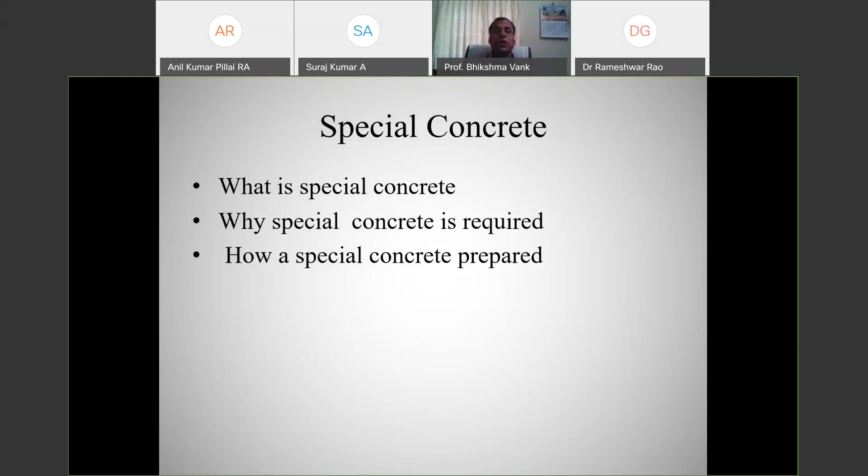And for special concrete, we definitely need special materials—fibers, bacteria material, different types of fibers, different types of cement, different types of admixtures, and different mix design methodologies. That is why we need special material in it.

Suppose we want to make self-compacting concrete, for which we need modified mortars, several admixtures—all these materials we require. So the purpose of this concrete is to make our concrete more durable.

And we want to see previous concrete. What is previous concrete? There are two meanings actually—old concrete or earlier concrete, and present concrete. Present concrete means the high strength concrete which we are making now. Present concrete, typically, we are making with robo sand.

We are making concrete with robo sand. What is robo sand? Artificially made sand. Why are we making artificial concrete? Because it is the order of the day, because river sand is not available. When sand is not available, we are supposed to make the concrete with robo sand, artificially made sand. For example, in our metro rail also we have used 100% robo sand, since river sand is not available.

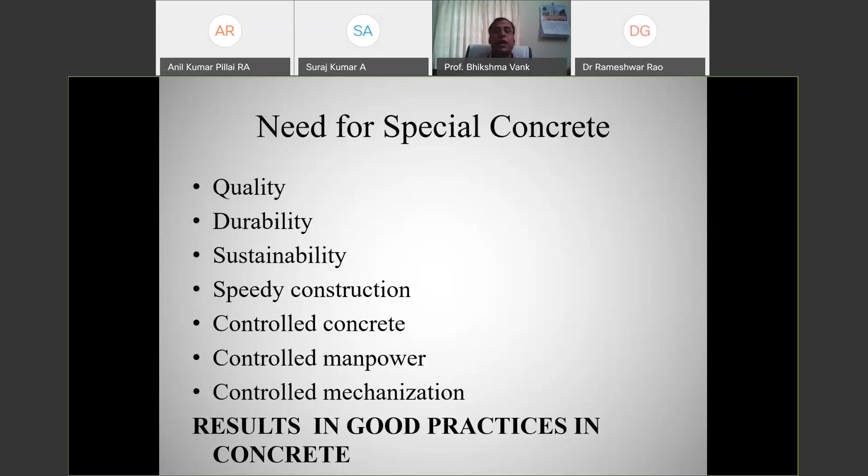Similarly, geopolymer concrete is one such concrete emerging in the present scenario for solving some of our problems. So fiber solves your crack problem, and bacteria solves your repair problems, crack repair problems. What problems are going to be solved with geopolymer concrete? You can ask me this question - each special concrete has some significance, some important solutions.

So what solution does geopolymer concrete have? Geopolymer concrete cannot be used as mass concrete, as I told you. We can use it as a special application concrete for limited applications - we cannot produce it as mass concrete in bulk quantity, so we are not able to produce that. But still this concrete has a future for special applications.

What is that special application, sir? You can ask me this question. Special application means, suppose we are using concrete for water tanks, sumps, drainage areas, your dams.

Wherever water retaining structures are there, our concrete is subjected to several leakages and dampness problems. So we can densify the concrete by using it for water structures - water tanks, water retaining structures, dam structures, and sumps - so that we can minimize all our leakage problems.

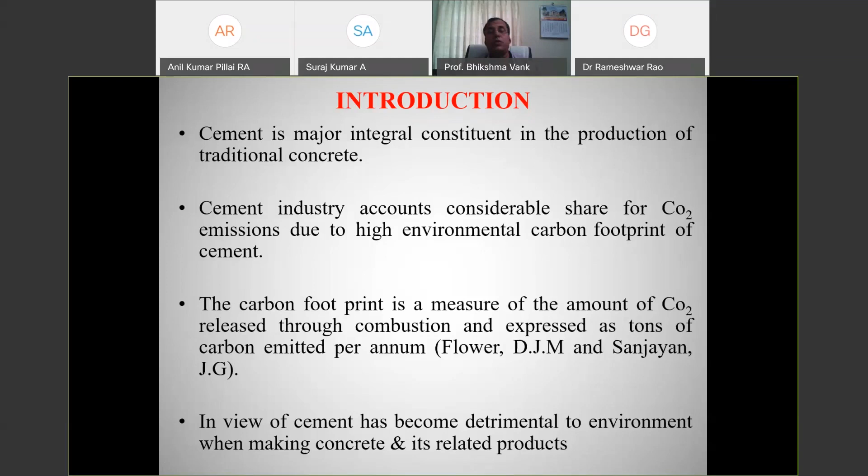Keeping that in mind, we are trying to use geopolymer concrete for making good durable concrete. So this is the general introduction. To make the geopolymer concrete, to minimize the cement content and to use the geopolymer concrete, we are using another blended material, GGBS, ground granulated blast furnace slag.

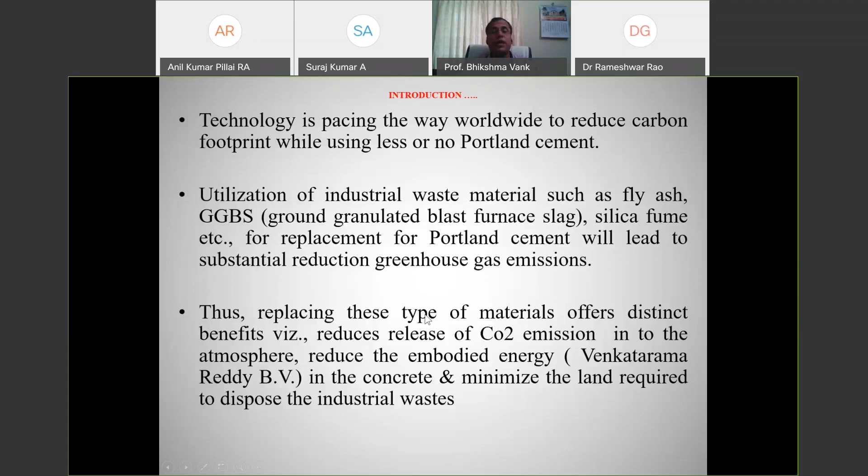This is a material which is available in several industrial places. So we can use this GGBS into our fly ash and we can make the concrete. That is the importance of the geopolymer concrete, and how a geopolymer concrete we can make. The standard procedures are there, and those procedures are being developed by the Curtin University.

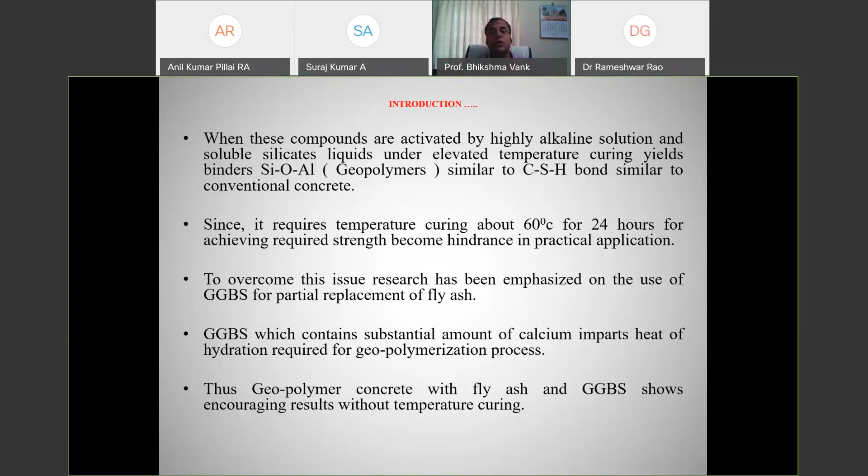We can make the temperature curing at 60 degrees. Such researches have been done earlier, but now 60 degrees temperature is practically not possible at site. So keeping that in mind, instead of temperature, if we can add GGBS into our fly ash, we can get heat of hydration and a good geopolymerization process. That is the motto with which this research has been moved.

And the research significance here is the necessity to make geopolymer concrete, as it is a partial replacement into the concrete. In the present study, it establishes the grades. We have done this research at our university. We can make concrete right from M20 to M60 by replacing GGBS into the fly ash material, and we can obtain the mechanical properties, and we can also develop the grades for M20 to M60, and we can also use this concrete into the RCC. That is what I'm going to show you.

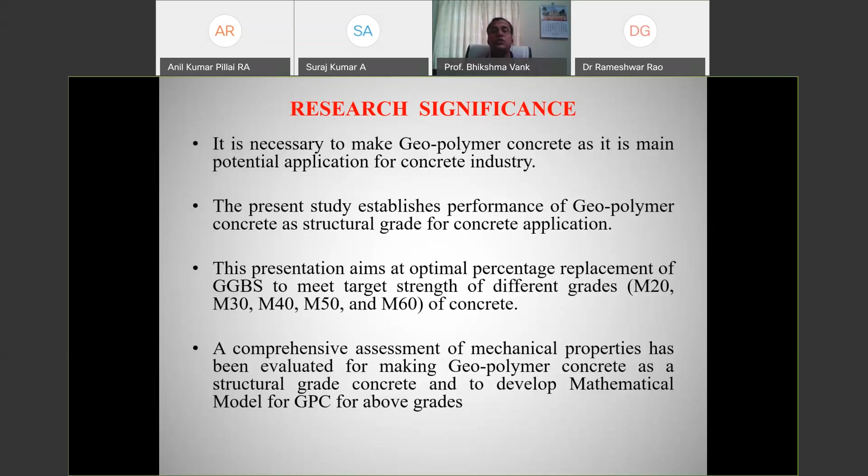The investigation was carried out at Osmania University on geopolymer concrete. These are some of the literature reviews done by several researchers. I don't want to go deep into the literature review here, but I'll try to explain the procedure of obtaining the compressive strength, the several trial mixes of geopolymer concrete with addition of GGBS, replacement levels, etc.

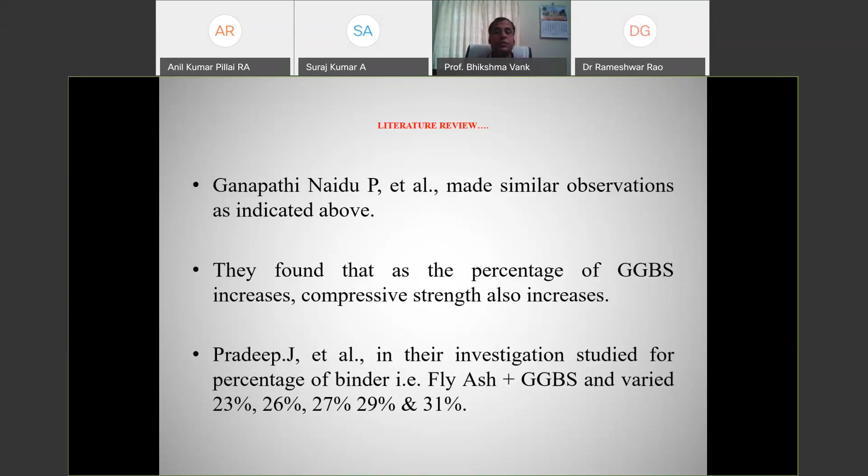I'll discuss with you the replacement ratios adapted: 25%, 50%, 75%, 100%. So I can tell you all the details. Many people have done work using GGBS, but nobody established the grades. So this is a work which is done at Osmania University, myself and my research scholar Naveen Kumar.

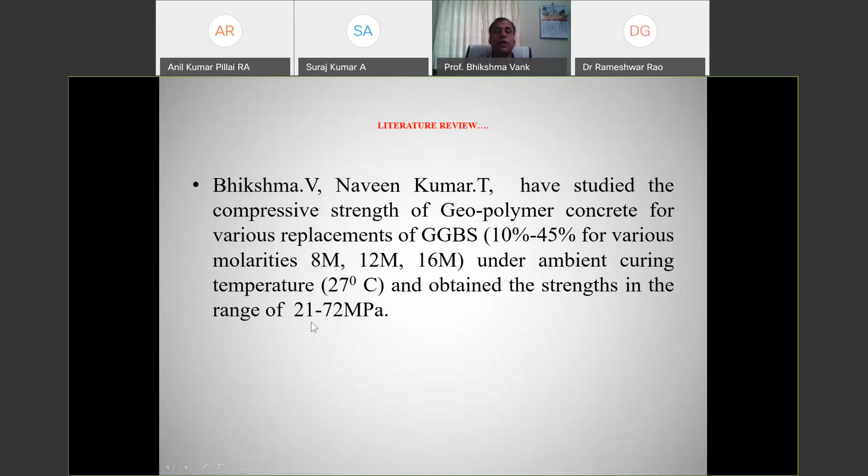We replaced GGBS 10% to 45% for the grades of concrete M20 to M60, and molarities of 8, 12, and 16 have been taken. This work is not with temperature curing; this is under ambient curing at 27 degrees, 23 to 27 degrees room temperature only. We obtained strength of 21 MPa to 72 MPa. That is equivalent to nearly M20 to M60.

So here, as I told you, I can show you this research for M20 to M60 grade concrete with the replacement of GGBS 9% to 43% after several trial mixes. We have obtained these values.

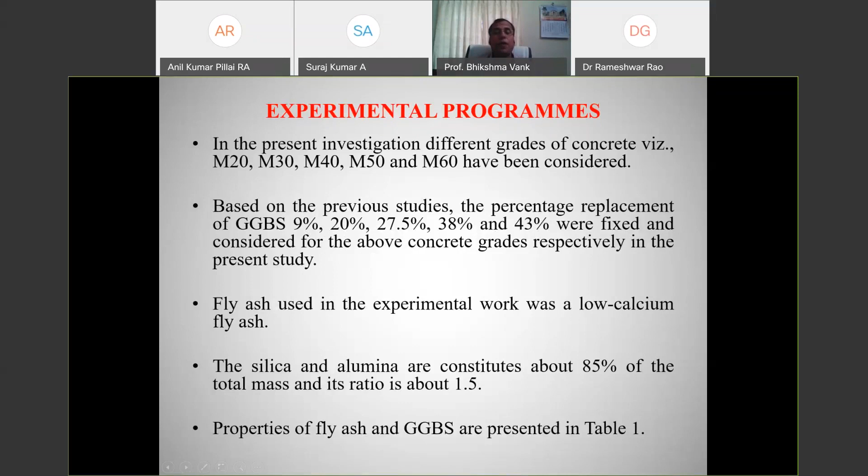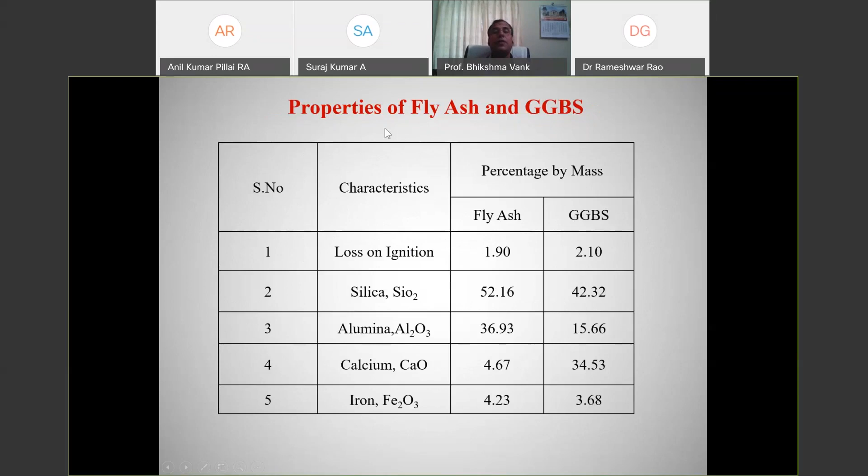So properties of the fly ash and GGBS are like this. We have investigated the fly ash material and GGBS percentages of the mass, and arrived at physical properties. These are the locally available materials: fine aggregate, then coarse aggregate we have taken, and the additional material used in this is a mixture of sodium hydroxide and sodium silicate.

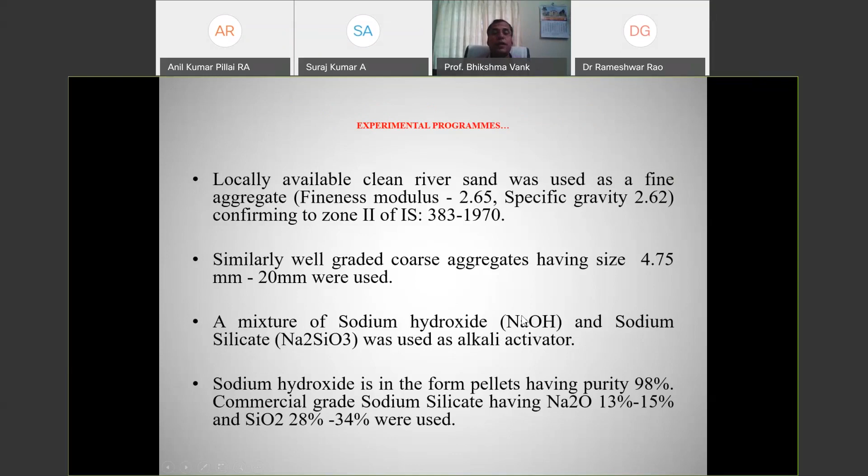You can even use potassium hydroxide and potassium silicate, but those are quite costlier compared to sodium hydroxide and sodium silicate. So that is how we selected. To make the geopolymer concrete, this is the combination: sodium hydroxide and sodium silicate give the alkaline liquid, or potassium hydroxide and potassium silicate give the alkaline liquid. The first combination is better and cost effective.

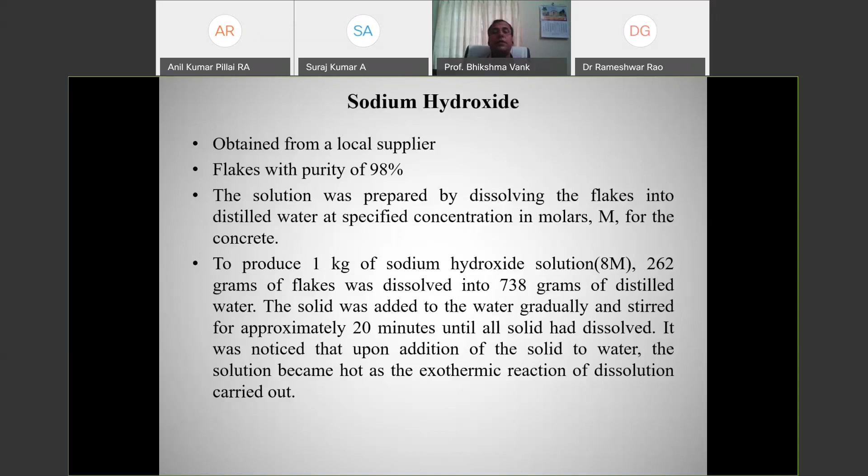All these procedures are given to produce 1 kg of sodium hydroxide solution at 8 molarity: 262 grams of flakes dissolved into 738 grams of distilled water. This is the procedure of the mix design. We have done several trials and got the compressive strength values. These are the requirements of sodium silicate: Na2O 14.7%, SiO2 29.4%, water 55.9%.

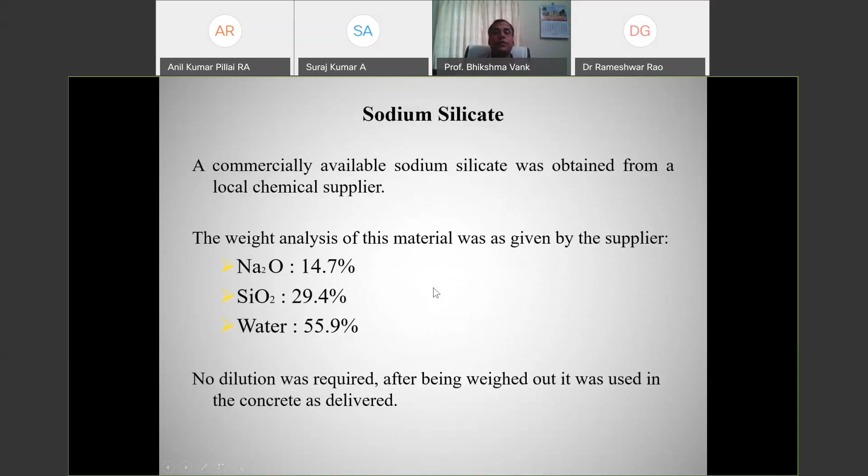This is how the mix design was taken, and this is very interesting: sodium hydroxide and water plus sodium silicate, and finally the preparation of the alkaline liquid will look like this. One day before the concrete casting, we need to add all these and keep the solutions ready, and only the next day, after 24 hours, can we make the concrete. This is sodium hydroxide material, this is water, and this is sodium silicate.

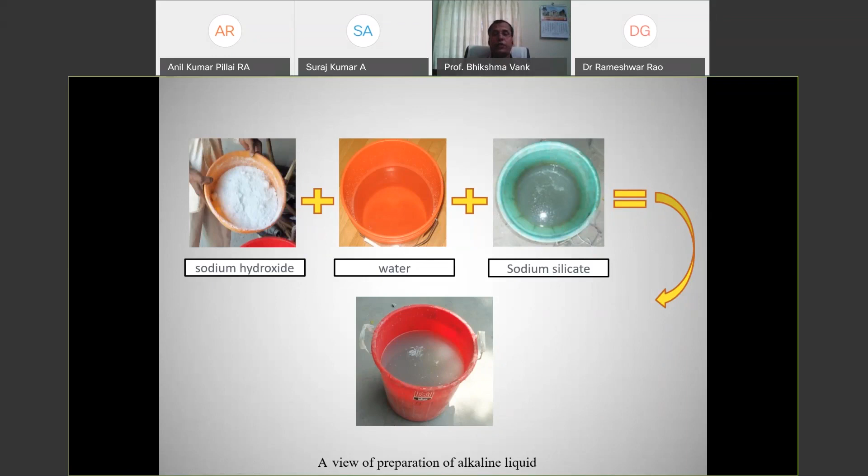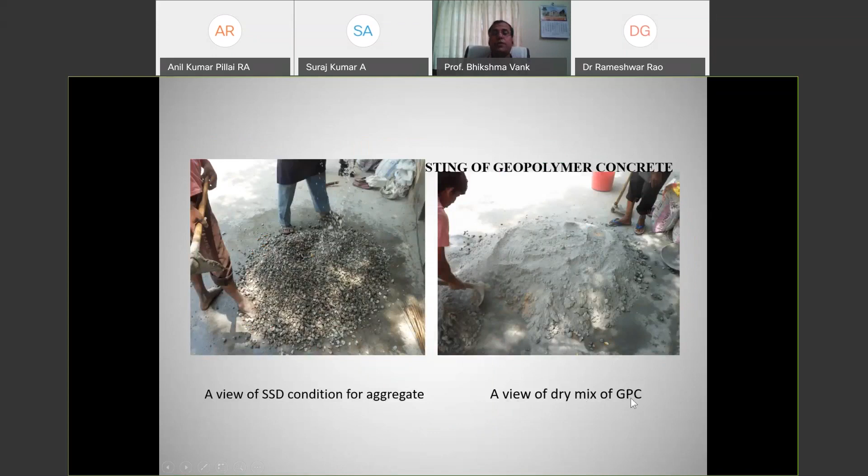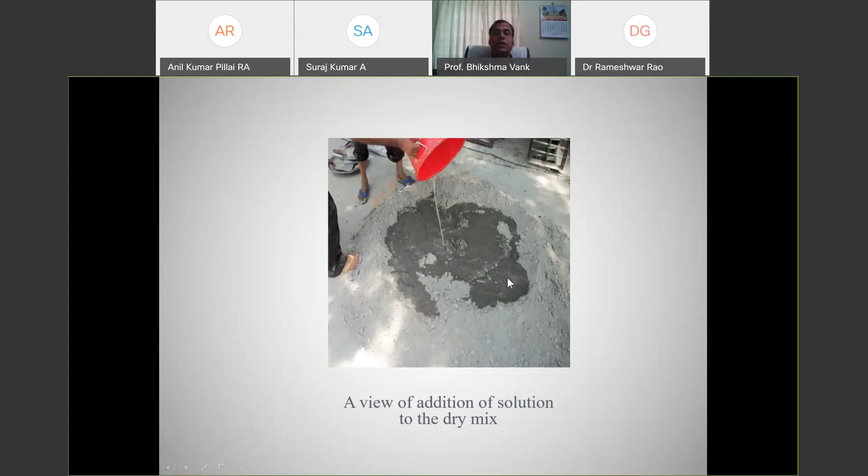We can get the alkaline liquid in this manner. This we have to add into the concrete, and I will show you how the geopolymer concrete looks. This is normal mixing of fly ash and GGBS, using the SSD condition of the aggregate, and a view of the dry mix of geopolymer concrete. We mix like this, and then add the solution. This is the addition of the solution—you add it like this and mix the concrete.

This is called geopolymer, freshly mixed geopolymer concrete. It is very homogeneous, you will not have any honeycombing, and it is very sticky—we can make good quality special geopolymer concrete. For all the grades we did several mixes to arrive at this type of concrete. It took nearly 2 years for us to understand this and make concrete of this nature.

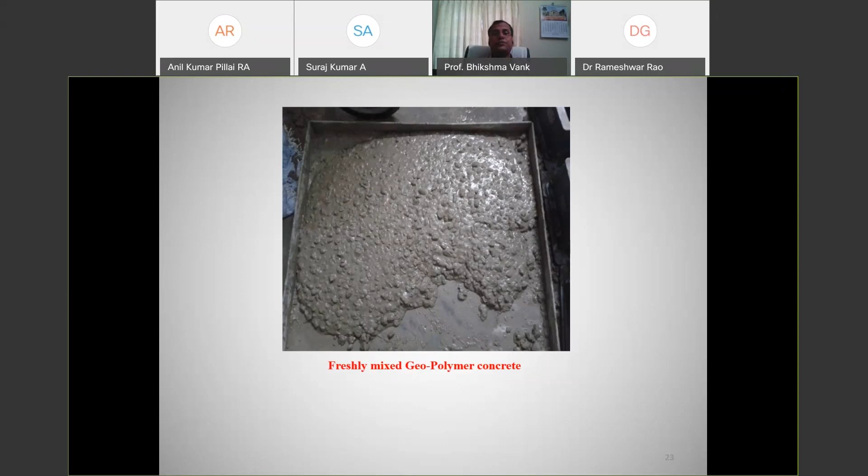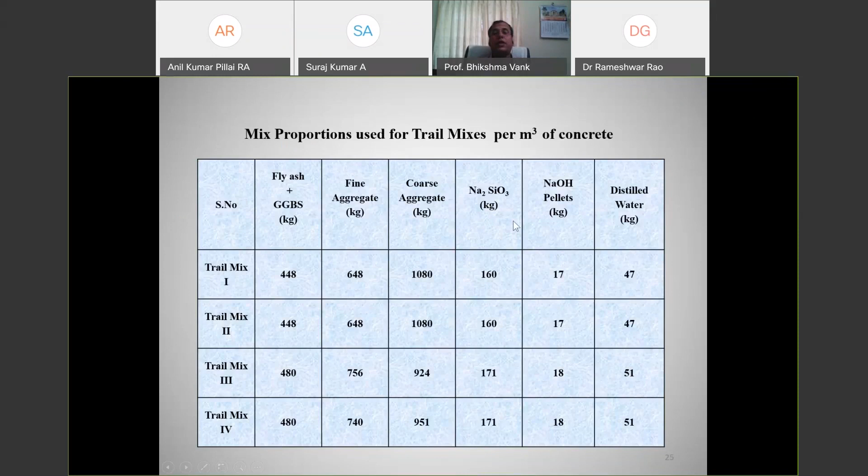Trial mix 1—several trials were done. Phase 1 trial mix programs for M20 to M60. For each trial mix, per cubic meter of concrete, trial mix 1, trial mix 2, trial mix 3, trial mix 4 we have done, with fly ash plus GGBS, fine aggregate, coarse aggregate, sodium silicate, sodium hydroxide—everything. This is how sodium hydroxide and sodium silicate look, and this is how the mixture is actually prepared.

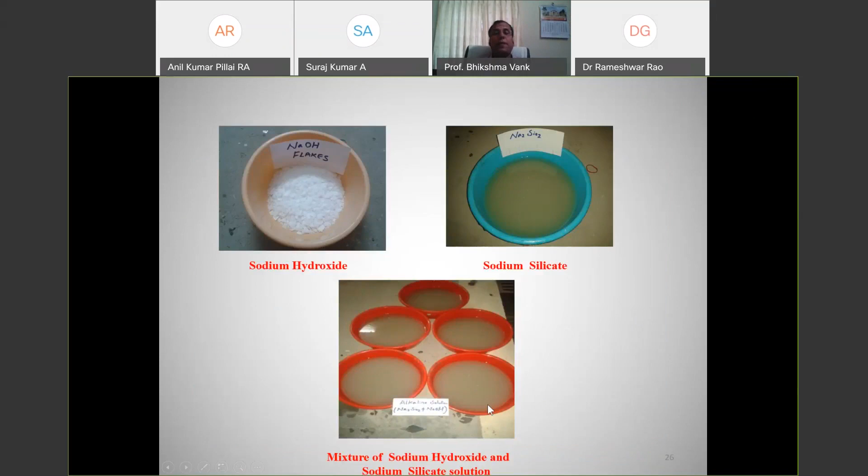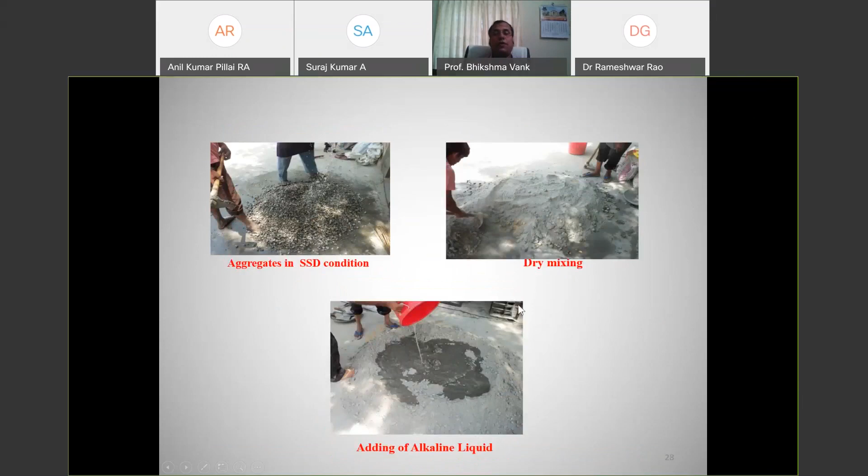Results of compressive strength for different molarities were: 17, 20, 24, 27, 30. As the molarity increases, compressive strength increases. But if molarity increases, the cost also increases. So therefore it's better to look at lower molarity—that is better for the research.

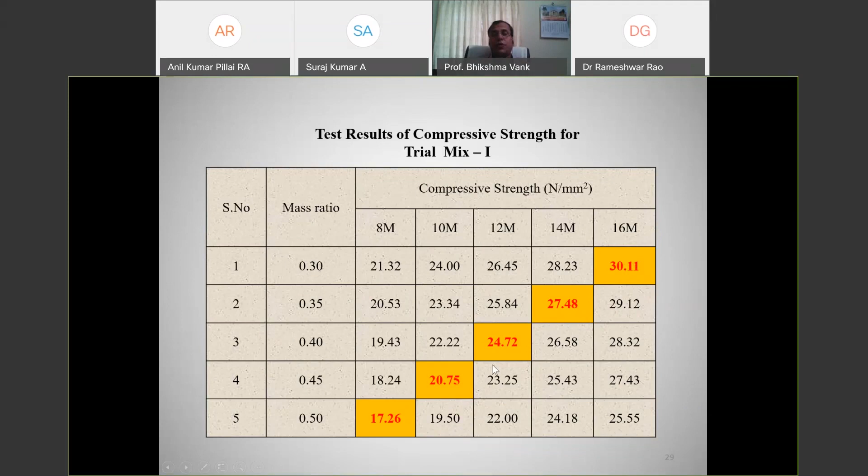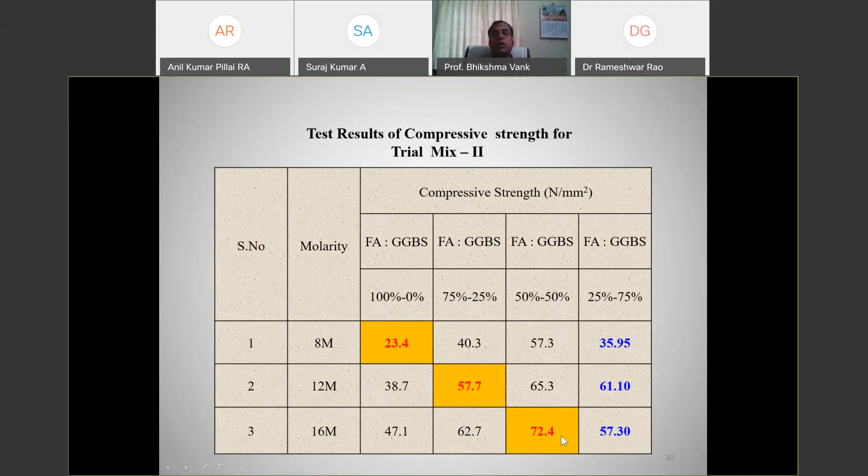If your molarity is increasing, your cost is also increasing—compressive strength is more, but cost is also more. Results of compressive strength for trial mix at 8, 12, and 16 molarity were 23, 57, 72. For trial mix 3, we got similar results: 8, 12, 16 molarity ranging from 46 to 72. The results for trial mix 4 ranged from 31 to 73. This is the final mix we got.

What we have done at our university is take only 8 molarity. For 8 molarity, we concentrated more on compressive strength, for grades M20, M30, M40, M50. For GGBS content: M20 is 9%, M30 is 20%, M40 is 27.5%, M50 is 38%, and M60 is 43%. As the grade increases, these proportions increase—and we have established these grades ourselves.

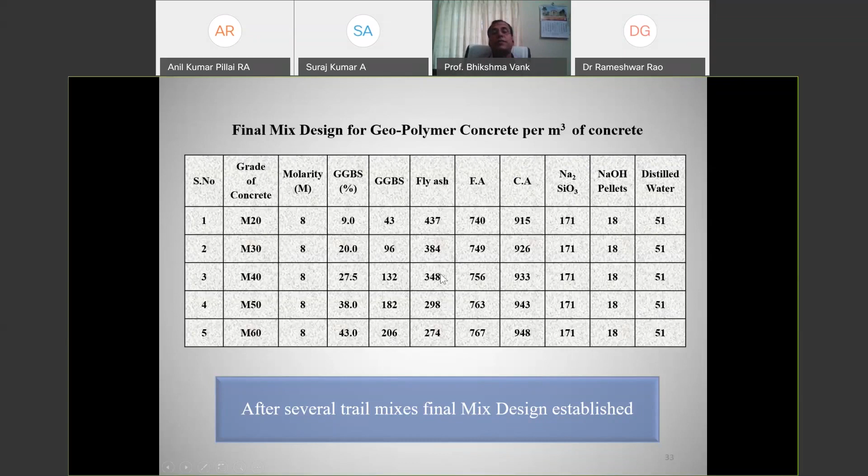Earlier, geopolymer concrete grades were not established. So with 8 molarity, we obtained the target strengths with these mixed proportions after several trial mixes. These are the trial mixes given. The mixed design for geopolymer concrete is arrived at for no cement and without heat curing—ambient curing—for M20.

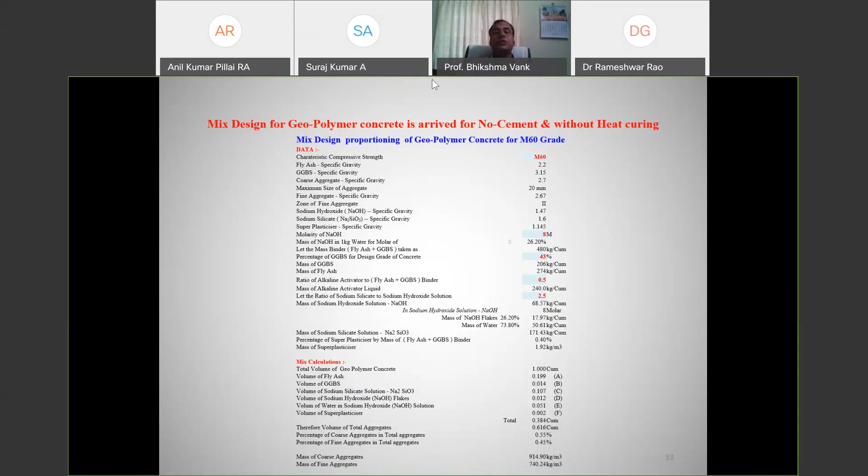This is the mix design done for M20, this is for M30, this is for M40, this is for M50, and this is for M60. All these trials have been done, and special concrete has been made. To improve the workability, dosage of superplasticizer has been used.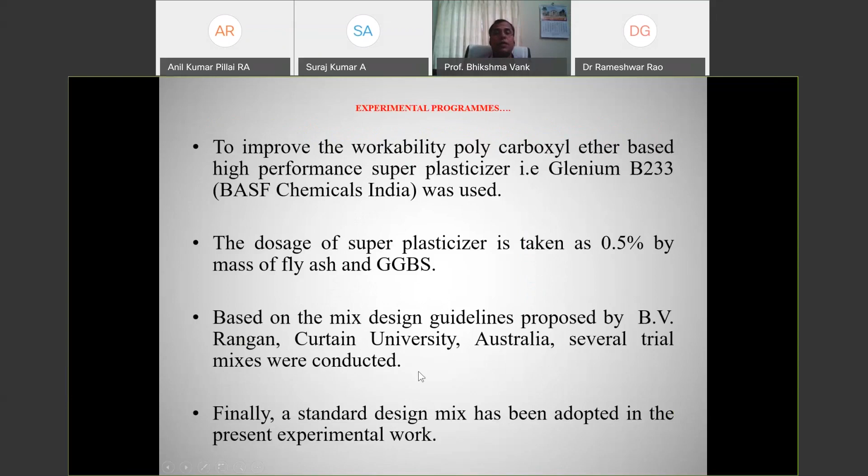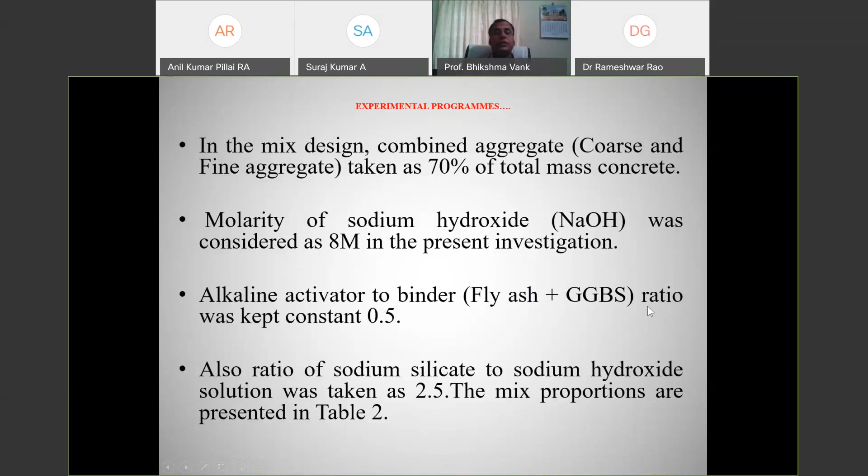All precautions have been taken by using 8 molarity, sodium hydroxide, sodium silicate, fly ash and GGBS, and the mix proportions of geopolymer concrete finally arrived at this one.

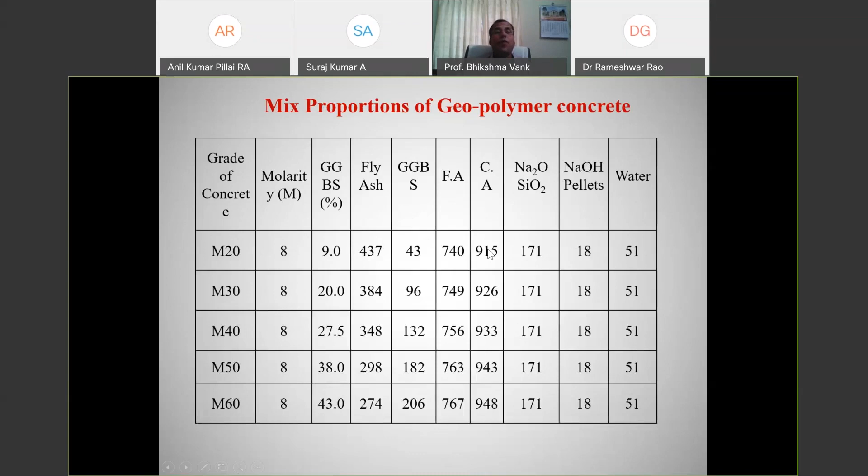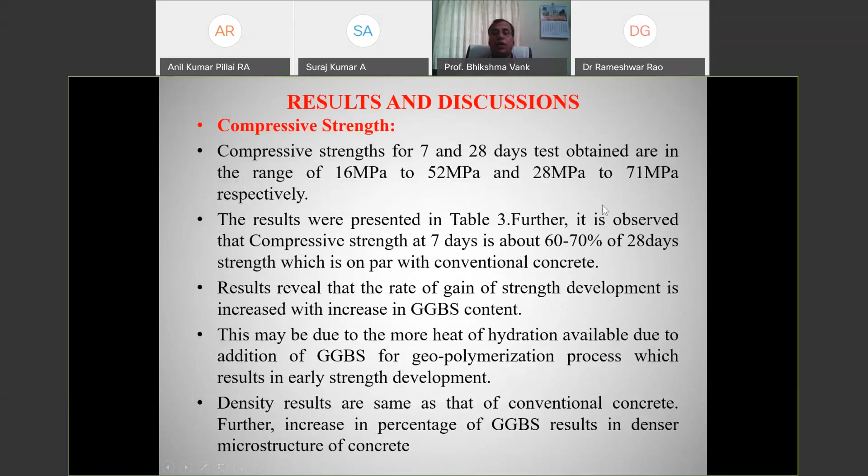Compressive strength values have been obtained for several mixes. For M20, 28 MPa, and the other value we got for M60 is 71. You can see here that the 28-day compressive strength for M20 is 28.33, M30 is 40.4, M40 is 50.46, M50 is 59.9, and M60 is 71 point something.

It means for each and every grade of concrete, target strengths have been arrived at. For M20, what is the target strength required? Ft is equal to FCK plus T into S. 20 means nearly 30, 27 we should get, 28 we got.

M30 means 38.25, 40.4 we got. M40 means some 48.25, 50.46 we got. M50 means 58 point something, 59.9 we got. For M60, it means for every grade, plus 10 is your target strength. So plus 10 target strengths have been arrived at.

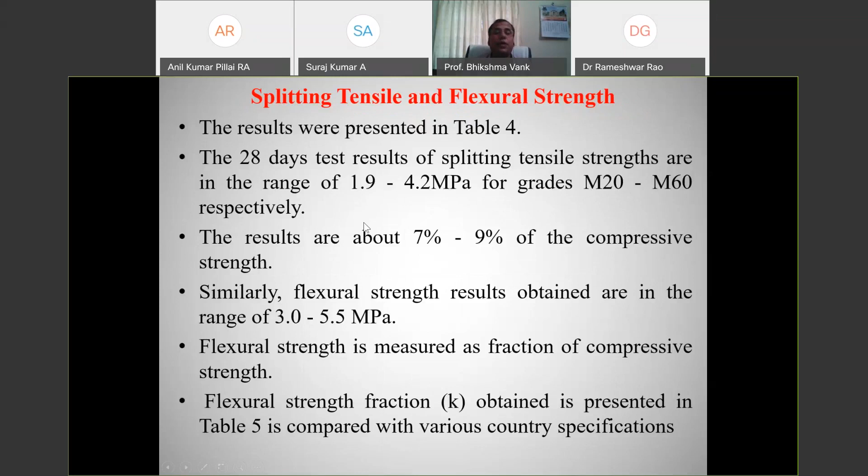Splitting tensile strength also we have checked, and we got the splitting tensile strength values of selected replacement ratios, and we got acceptable values. These are the splitting tensile strength values, and flexural strength values also we got, and we have checked these values with the Indian standard codes and other codes.

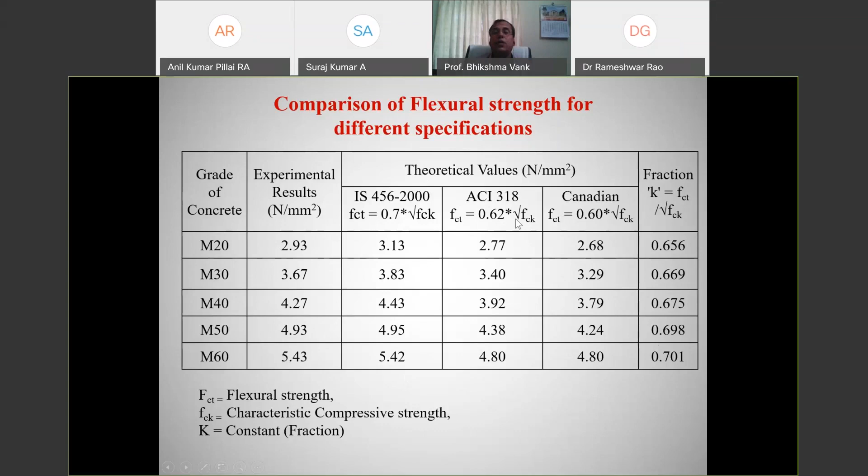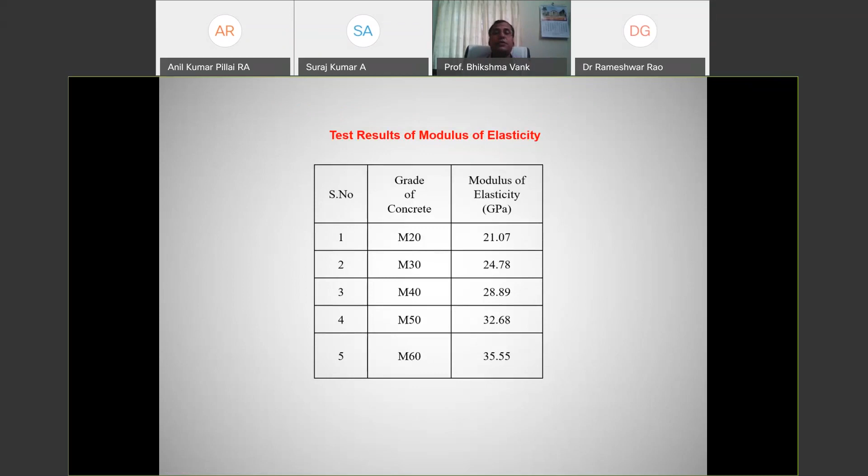Our target strengths were checked against IS 456, where flexural strength is 0.7 root FCK. These values are compared and are within very acceptable limits. We also checked ACI code, Canadian code, and all these codes. Results of modulus of elasticity were also checked and are within the acceptable limit. Basic results of IS 456, compressive strength, all these mechanical properties have been checked.

After checking any concrete, not only geopolymer concrete, if you check high strength concrete or any grade of concrete, checking the mechanical properties alone is not enough. Mechanical properties means compressive strength, workability, splitting tensile strength, flexural strength, Young's modulus — all these are basic mechanical properties of the concrete.

These basic properties, whether they are workable for your RCC design or not, we need to check. To check that, again, we need to investigate certain things — development of a mathematical model for geopolymer concrete.

What we have done is develop stress-strain relationships for each grade of concrete, and these stress-strain relationships are used to develop a model for the stress-strain curves. These models are superimposed onto the moment carrying capacities and load carrying capacities for the flexural behavior of the beams.

We cast cylinders for the target strength mix proportions we obtained, tested them, and developed the stress-strain curves. These stress-strain curve values are superimposed onto the RC members, and theoretical values have been obtained. Experimentally, again, we tested the beams and compared the experimental and theoretical values. So this is how the investigation has been done.

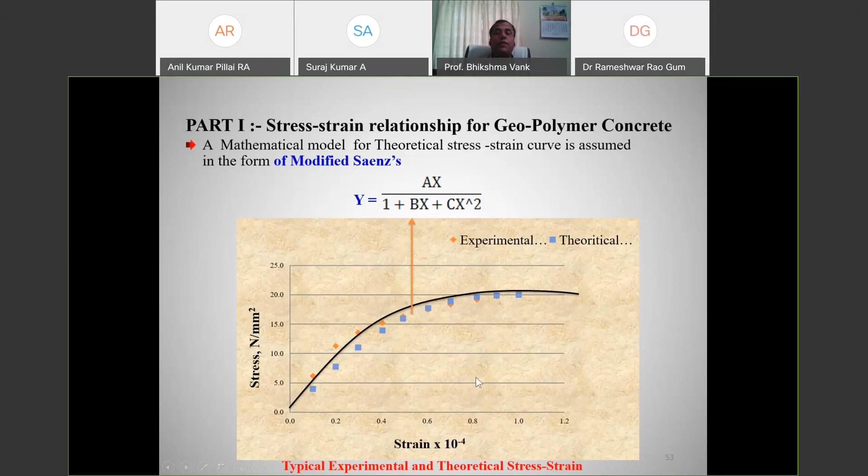Stress-strain relation for geopolymer concrete uses a modified Saenz model. This is stress, this is strain of the concrete which we got experimentally and theoretically, and we developed an equation: y equals ax divided by 1 plus bx plus cx squared — a parabolic equation for each grade of concrete, and this is normalized.

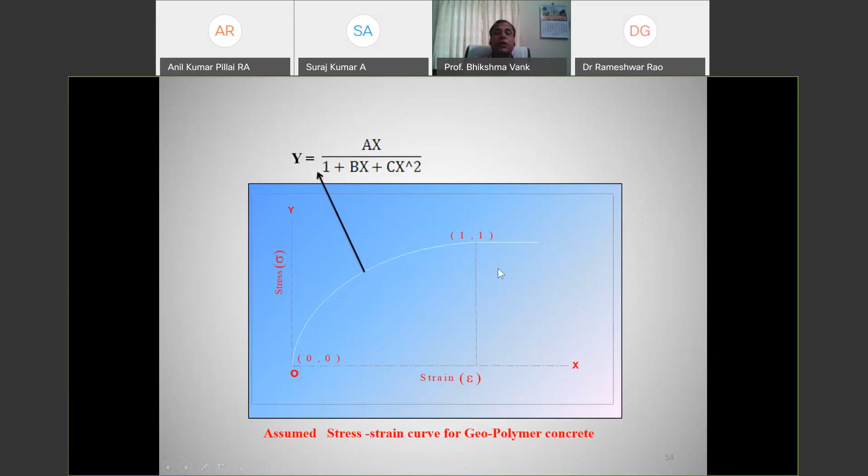We non-dimensionalized the data to get a curve, and boundary conditions were obtained for stress and strain, with the non-dimensional values being 0,0 as the initial value and 1,1 as the final value. Intermediate values have also been obtained.

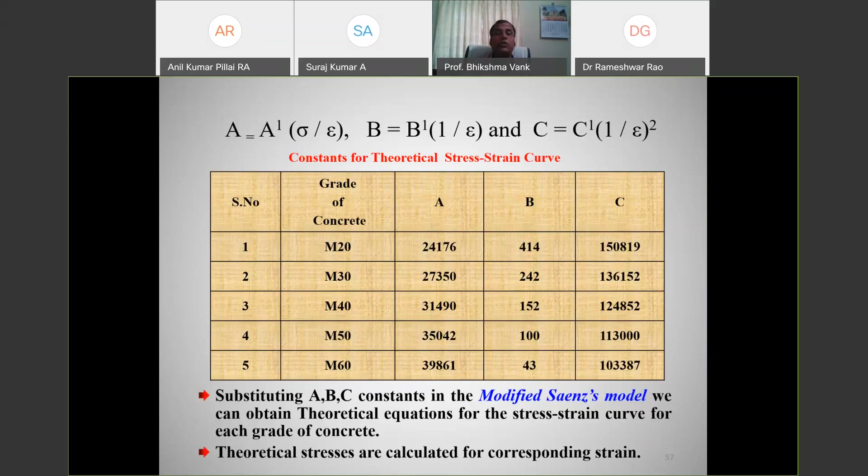For that equation, the constants have been arrived at for each grade of concrete. By taking the equations, all the constants are arrived at for A, A dash, and A double dash — two types of constants we get. Experimental and theoretical values have been compared.

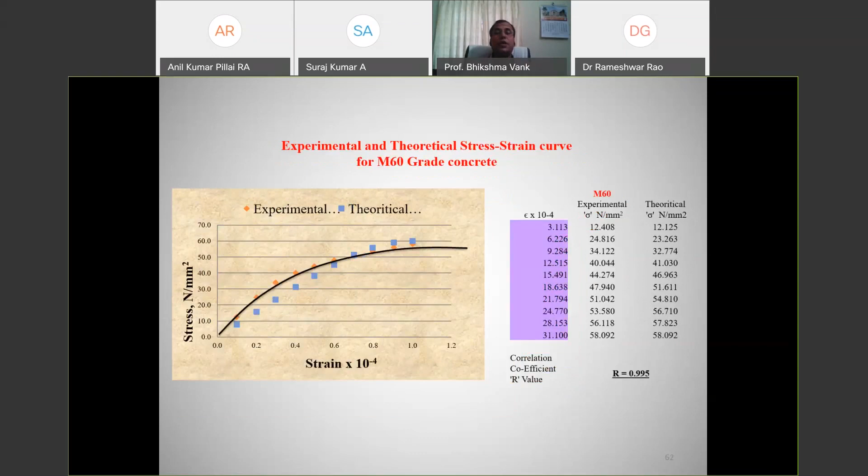For each grade of concrete — this is M20, this is M60 — for all the grades, right from M20 to M60.

The idea is to obtain the moment equation. From stress-strain curves, we want to develop moment-curvature relations, and we want to know the design parameters for geopolymer concrete, and see whether the design is okay for geopolymer concrete, for which we have investigated the design constants.

These are the conventional IS 456 parameters: depth of neutral axis, center of gravity, ultimate moment, compressive force, stress block parameters, moment of resistance, and so on. After getting this, if you can visualize the conventional concrete stress block parameters, we can also get the design parameters for geopolymer concrete.

That is alpha, beta, gamma, xu by d. Mu is equal to 0.138 FCK BD square. This is Mu is 0.138 FCK. This is for Fe 500 grade steel, 0.133 FCK BD square.

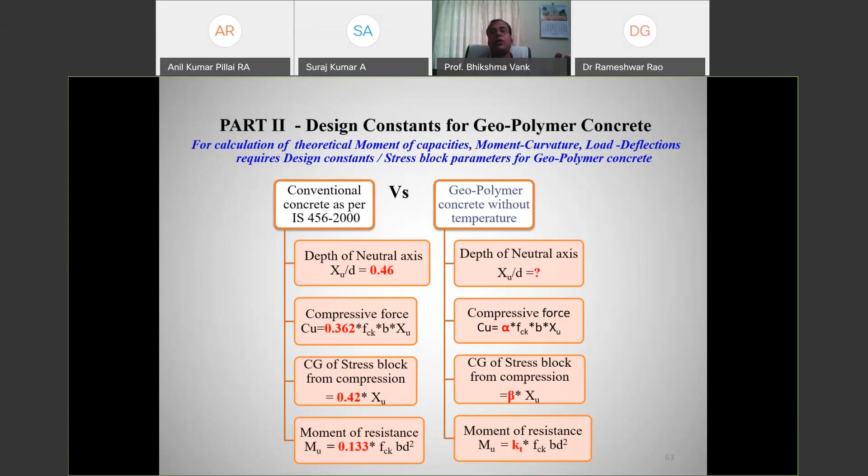What would be the value of geopolymer concrete here, KT? We want to obtain the values of xu by d for each grade, and this is alpha value, beta value, xu by d stress block parameters values we want to obtain. After obtaining these constants, we want to design the RC beam. Then only your geopolymer concrete comparison can be done, with which we have moved this research, and we have obtained all these values.

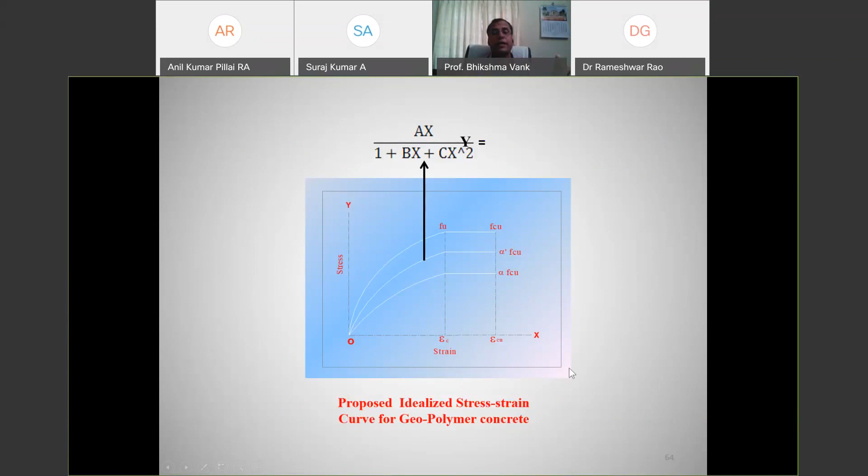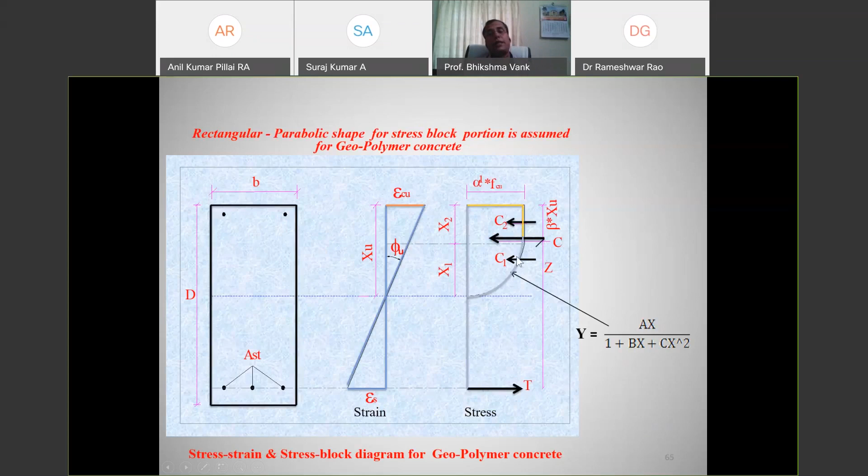This is the equation which I have shown you earlier, that idealized stress strain curve. And this is, as I told you, the stress strain curve we got from M20 to M60 have been superimposed onto the RC cross section, assumed RC cross section. That is, your beam is 1500 mm by 150 mm by 230 mm, and for that cross section, those values have been imposed here to get the design parameters.

All those curve constants have been taken into consideration to get the compressive force. The compressive force equation is the area of the curve under the strain, can be obtained like this. This is the compressive force, how we can obtain it.

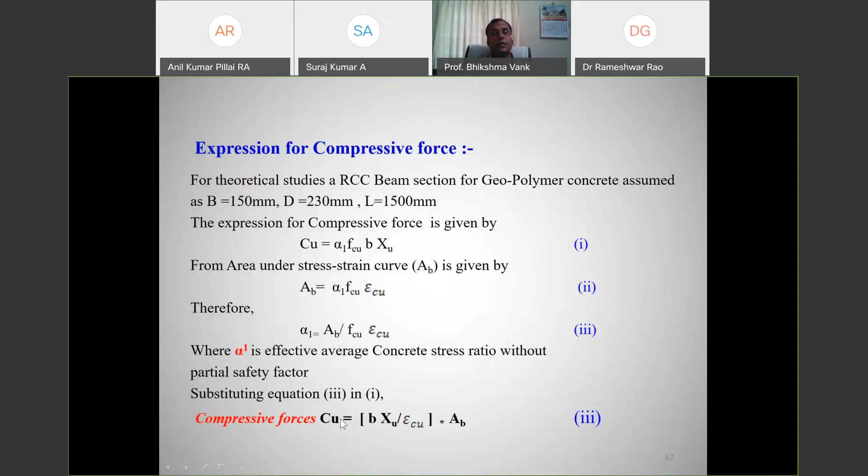All those stress strain curves for each grade of concrete can be superimposed onto RC sections, and we can obtain this. So your area of the curve, stress strain curve under this is y is equal to x by 1 plus bx square, like form. AB is equals integral of f dx. F is stress, this is strain. Integral of y dx, this is nothing but integral of y dx means f d epsilon.

So this is integrated. F is equal to x by 1 plus, where f is equal to the assumed model of equation for stress strain curve, which has been taken here. So we can derive the equation integral of f of y dx. We can integrate to get the compressive force.

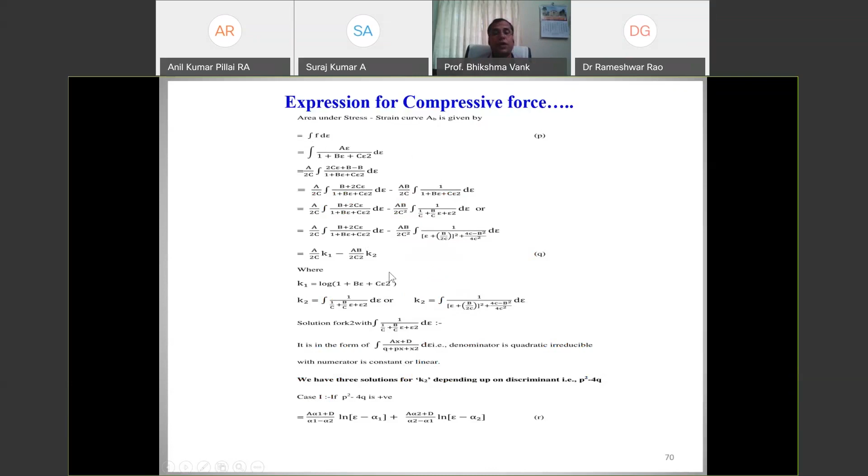We want to have a compressive force in this for geopolymer concrete, for which the integration has been done, and then compressive force formula is obtained. By obtaining all these integrations process, we can get the compressive force.

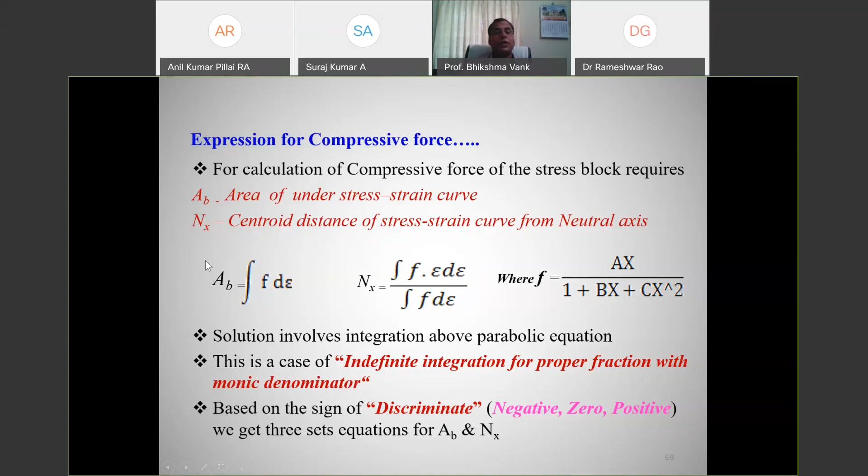This is the compressive force which I am talking about. You get it: B is a cross section, depth of neutral axis, strain in concrete. All these equations you can get it. Cu is equal to bxu by epsilon cu into AB, where AB is the integrated value, area of the stress strain curve, which is AB. AB can be, we can arrive at the AB value because your compressive force is linked with AB, which I have shown you here.

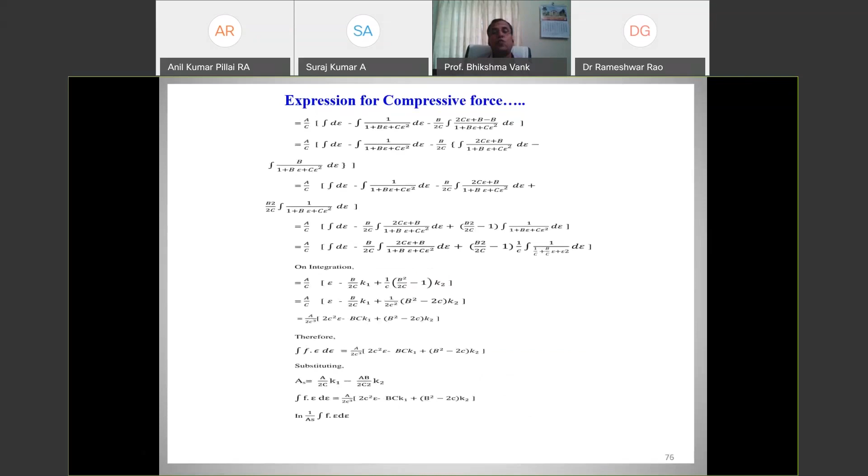Your compressive force is B into x, xu by epsilon cu into AB. AB is the integral of f of d epsilon, y dx. Integral AB is integral of y dx. That has been integrated and then we obtain the compressive force value.

Why compressive force value are we trying to obtain for geopolymer concrete? Because we want to have the moment, bending moment of a beam. We want to have a bending moment of a beam. What bending moment? Theoretical bending moment. To get a theoretical bending moment...

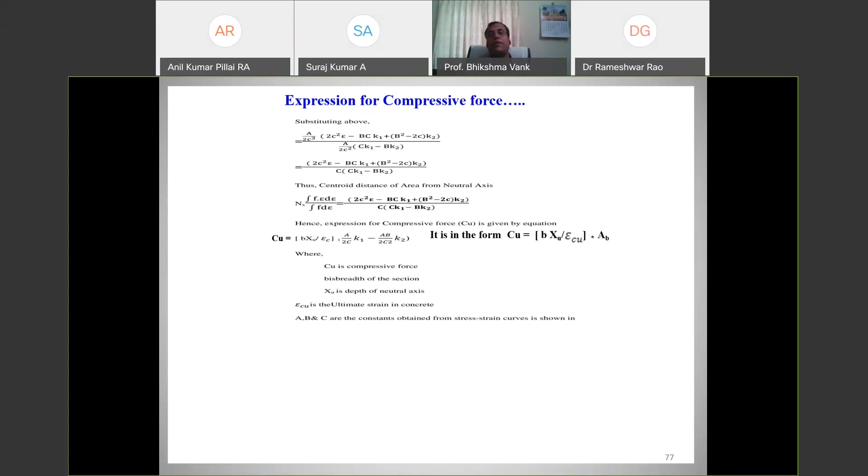...your compressive force into Z, or tensile force into Z for a balanced section. So compressive force into Z, depth of neutral axis, we have there, and then lever arm is there. We can get it easily. So that is how we have integrated and then calculated.

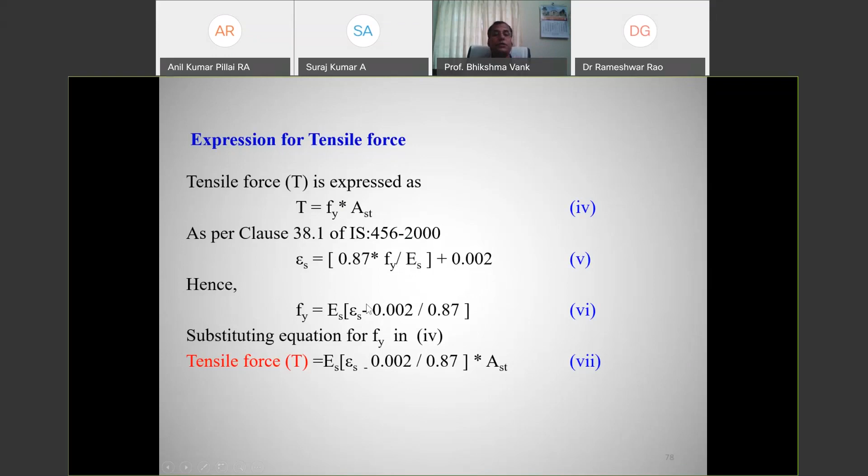Similarly, the tensile force is fy into AST. We got from the IS 456 codal provisions, and then tensile force also calculated. Once you get compressive force and tensile force for a balanced section, C is equal to T, we can arrive at all this.

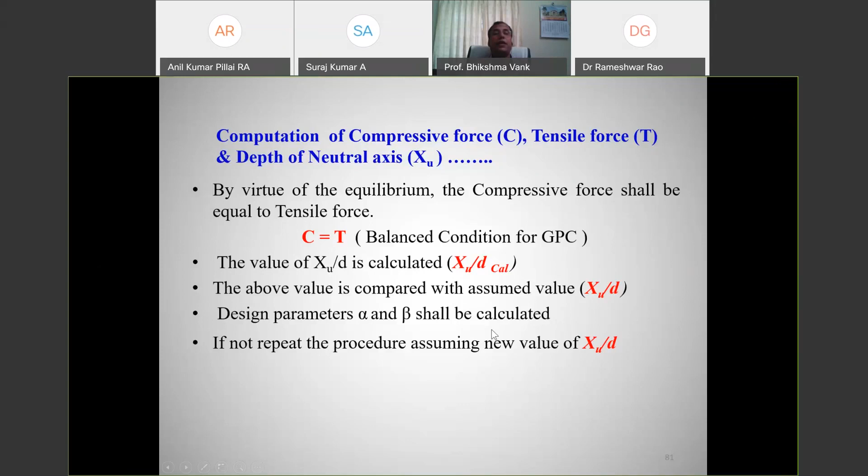Balanced section C is equal to T, we can get the geopolymer concrete balanced section moment. And depth of neutral axis also we can get it, where compressive force equals tensile force, their depth of neutral axis we can catch up, and we can also get the value of xu by d. Similarly all the parameters we can get it, and we can see compressive force is equal to tensile force for all intermediate neutral axes. We can try for forces where compressive force is equal to tensile force, there the depth of neutral axis can be taken. That is how it is picked up.

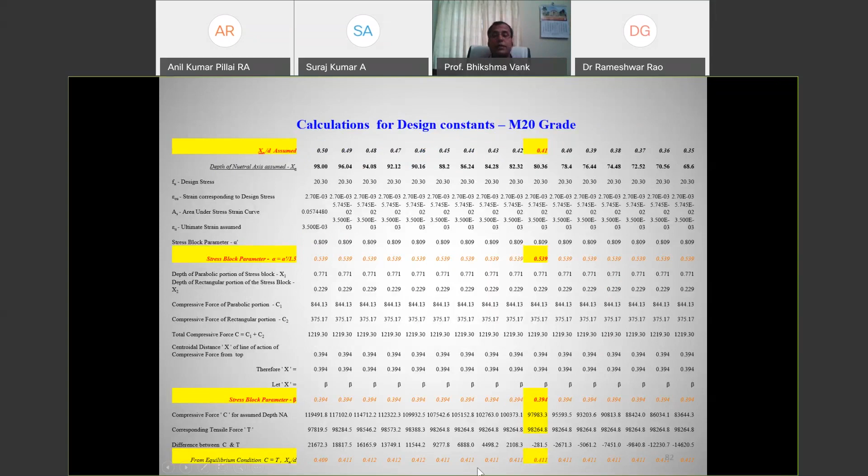The alpha value can be calculated, beta value can be calculated. Then your depth of neutral axis also can be calculated from your analysis. This is how moments can be obtained and curvatures can be obtained, and moment versus curvature for M20 to M60 grades of concrete have been drawn like this.

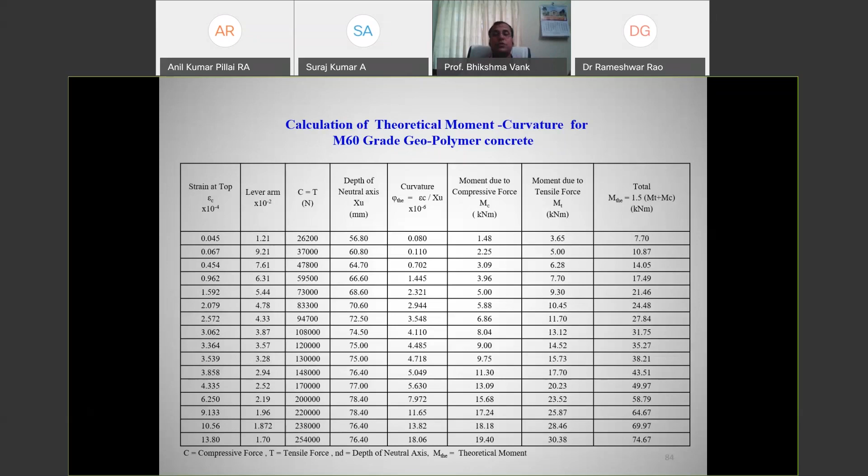Calculation of theoretical moments and experimental moments for geopolymer concrete is from the beams. These are all the theoretical moments which we got: compressive force, tensile force, depth of neutral axis, curvature, and moment due to compressive force are calculated. This is ultimate moment, 74.67 kilonewton meter, theoretically arrived from M20 to M60.

Similarly, experimental work and validation of the model for geopolymer concrete without heat curing has been arrived. Mix proportions as per final mix design also has been arrived, M20 to M60. For each mix case, 3 beam specimens have been cast, 150 by 230 by 1500 mm. Whatever theoretical moments we got is for this same cross section, which has also been taken for experimentation.

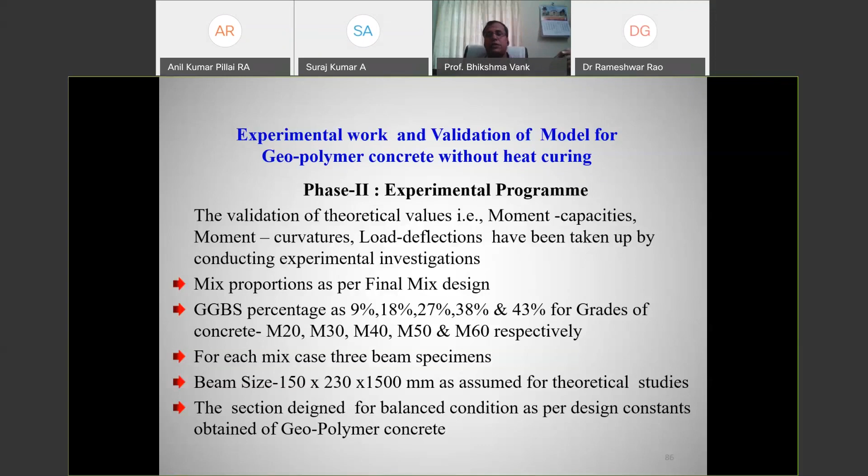Same area of steel has been taken for experimentation, cast with the same grades of concrete, and then we arrived at the experimental moments using 2-point loading. These two need to be compared - that is the importance of this investigation. If they are nearer, then the study and comparison are okay, and you can use the geopolymer concrete for design. All proposed experimental details of reinforced geopolymer concrete beams have been obtained.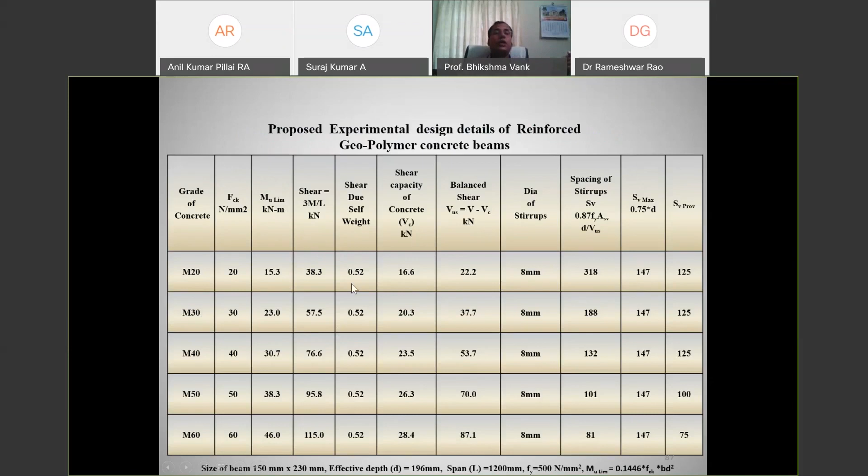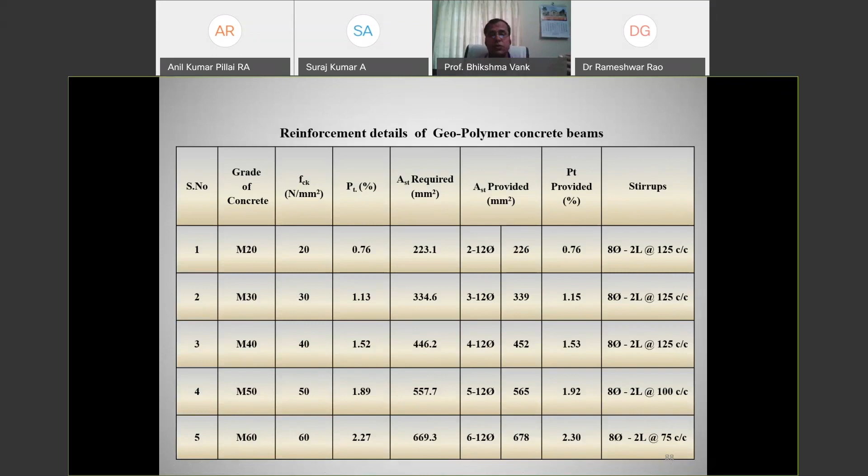For shear, then moment, all these details were obtained. Your experimental moment should be more than theoretical moment - then only your geopolymer concrete holds good. In our case, we got all moments more than the theoretical moments. This is how beams have been cast and tested under universal testing machine by comparing curvatures at the top and bottom.

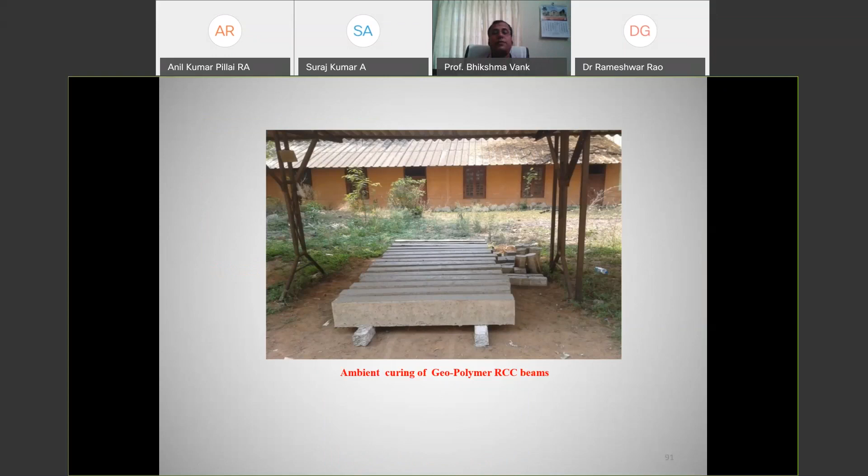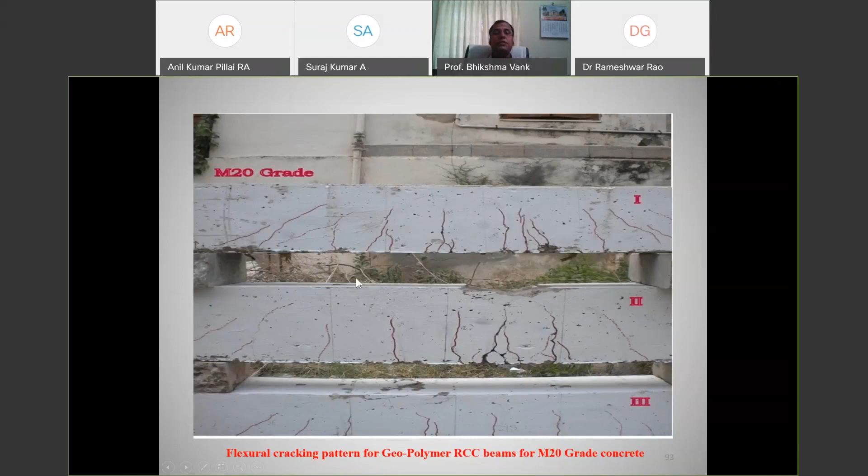Validation of theoretical and experimental moment - their pattern is same, so experimental moments are more when compared to theoretical moment. It means your investigation which you have done shows geopolymer concrete is effective for use in structural grades of concrete, special concrete.

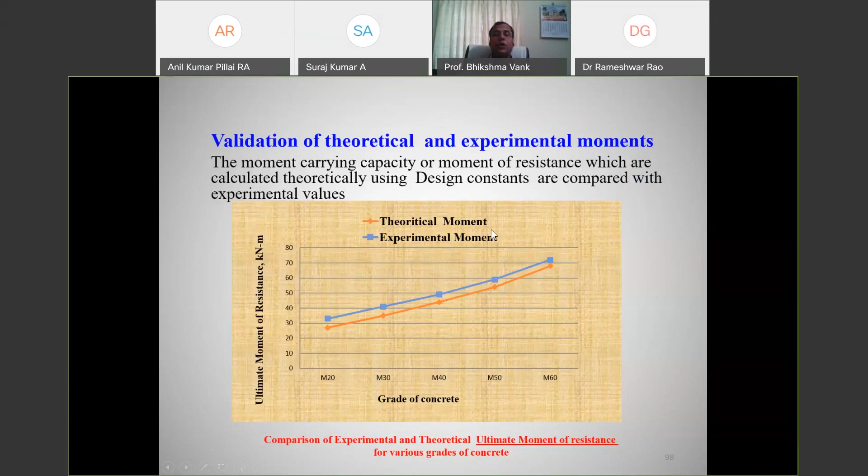Theoretical moments versus experimental moments - please see here, all these experimental moments are more than the theoretical moments. This is 27, 33, 35, 41, 44, 49, 54, 59, 68, 72. It means your load carrying capacity of geopolymer concrete is more than the theoretical moment. This is theoretical, this is experimental, so therefore your investigation is good.

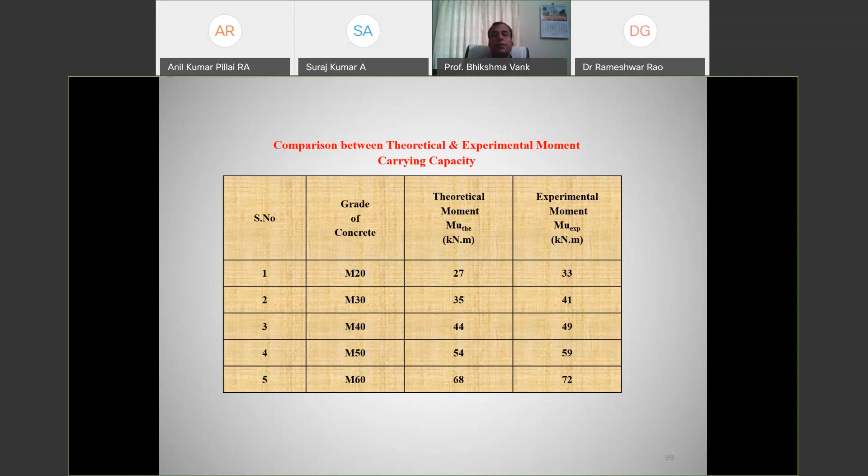You can use effectively the geopolymer concrete RC members for your construction - this is applicability, this is application actually. Based on this investigation and these results, we can rely that yes, geopolymer concrete beams can be designed for structural purposes. This is validation, moment versus curvatures.

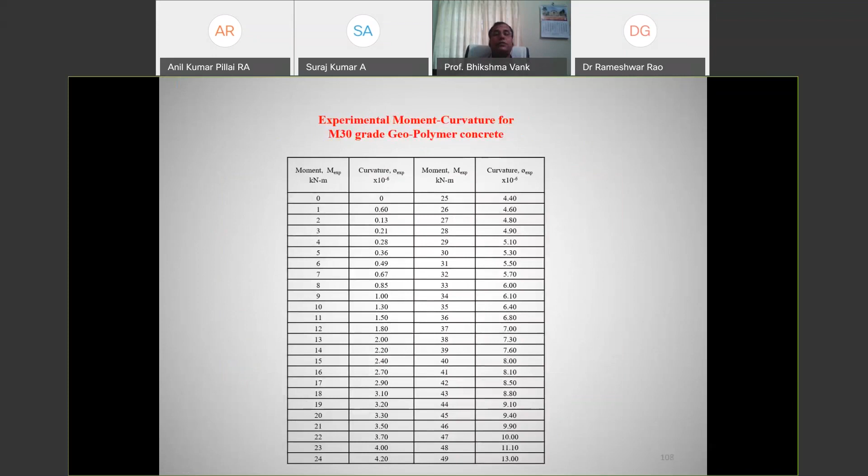Values have been obtained for all grades of concrete. Experimental moment curvature for M20 to M60 grades of concrete, theoretical and experimental. As I told you earlier, the correlations also have been obtained for experimental and theoretical. Correlation coefficients are 0.9 for M20 grade concrete, 0.994, 0.993, 0.997, 0.994, 0.981.

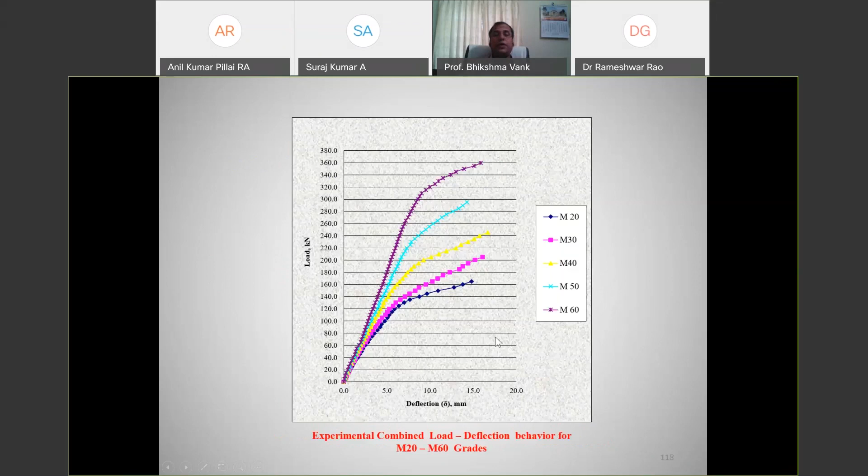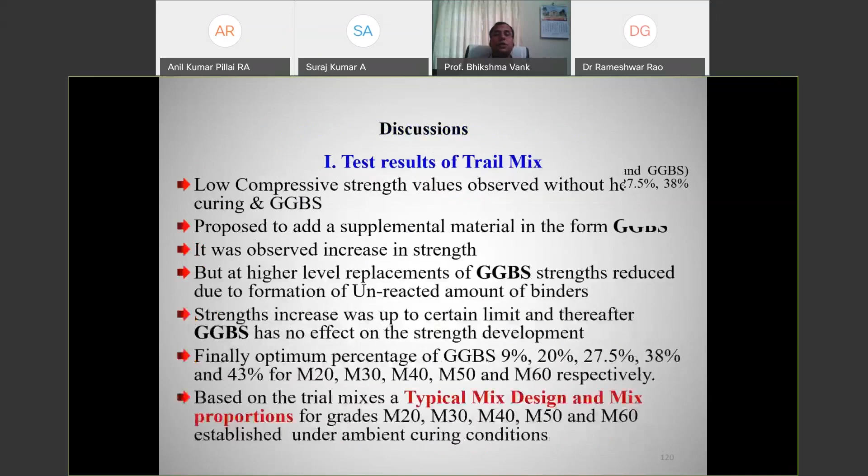So this is another check. Then load versus deflections also obtained here - as the grade is increasing, this thing is increasing. Theoretical and experimental are also compared. These are all the trial mixes that we made, as I told you earlier. All mechanical properties are compared, and theoretical validations have been done.

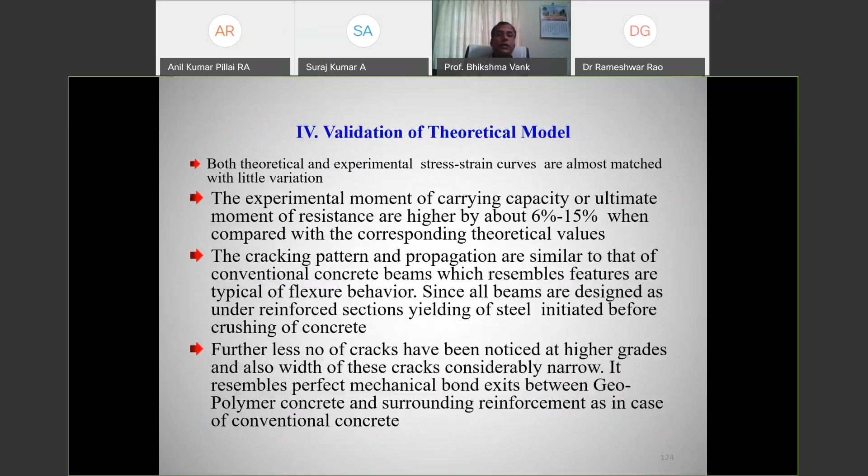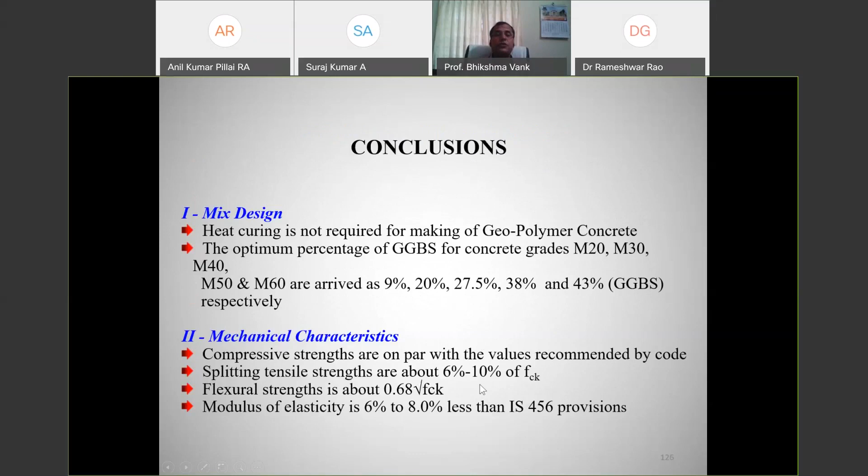Conclusions: we have done several trial mixes, and arrived at the GGBS replacements, with mechanical properties compared with the code provisions. Stress strain curves are being developed for geopolymer concrete, and a mathematical model has been obtained. All stress block parameters - alpha, beta, gamma, xu by d - have been arrived, and finally they are tested for validation for load versus deflection and moment versus curvature.

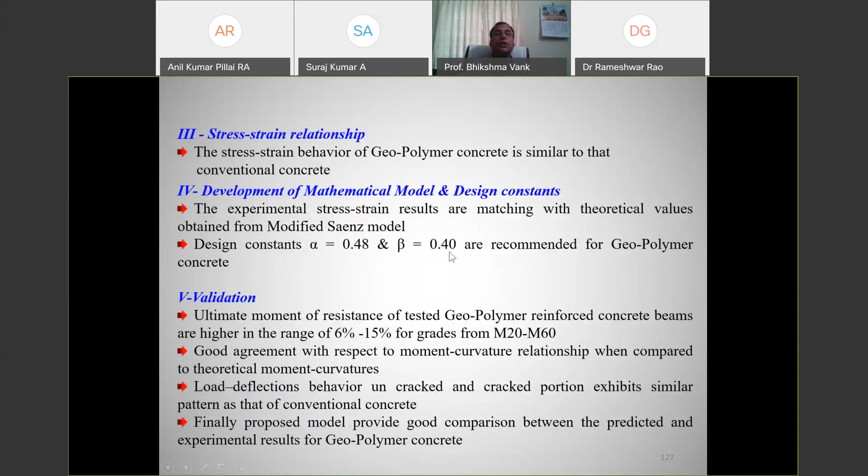So mix design is developed here for M20 to M60 grades of concrete. These are the contributions - design constants also have been arrived in this investigation.

Future scope: you can do work for high strength, very high strength concrete. Some of our research scholars are now doing M70 and M80 - we got the compressive strength for M70 and M80, and our research scholar is developing the mathematical model again for M70 and M80. Durability studies can also be done, and development of self-compacting geopolymer concrete one can try. These are some of the references we have used in our investigation.

So with this I conclude my presentation. Now I will give the forum for discussions and any clarifications on the topic which has been given to me.

Thank you so much, sir. It was a very interesting presentation. You had covered in detail about the mix design of geopolymer concrete, which is different from a conventional mix design.

Yes, that was, in fact, even that sodium hydroxide, sodium silicate. I think a lot of procurement has to be done and a lot of testing also has to be done to make a special concrete. Yes, so that has been done.

But how far is it being used in India, sir? That was one question yesterday also. It was a very good question, sir.